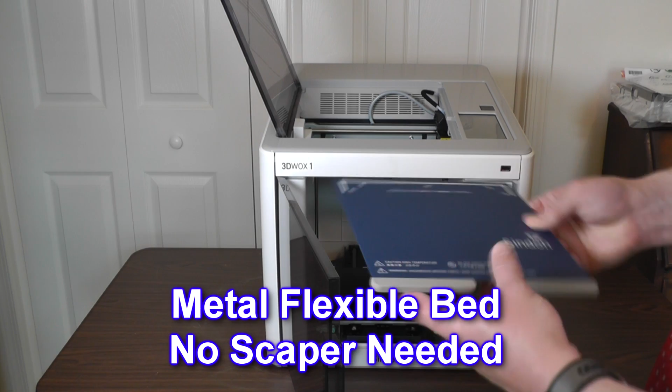The flat magnetic surface of the new 3DWOX1's build plate solves the problem I had with Y-axis play on the original DP200's aluminum bed, as well as solving the bed adhesion problem I had with the sister model DP201's build plate. And the new flexible heated bed plate not only affords great quality prints, but also provides the ability to flex and bend the plate to ease print removal with less use of the dangerous scrapers, knives, and other tools. I reported both of these issues to Sindoh on their previous models, and it's great to see a manufacturer that listens to its users and responds accordingly.

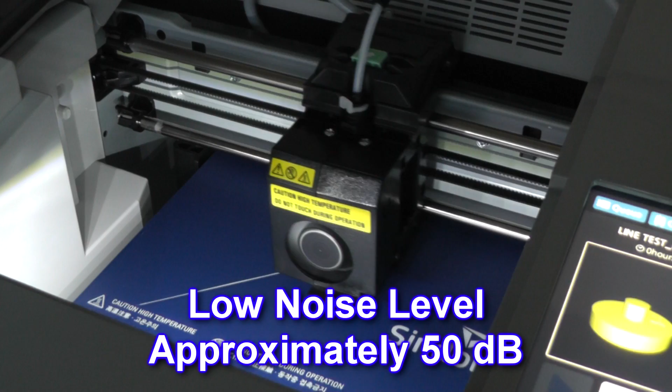But wait, that's not all. I noticed right away that the 3DWOX1 is way quieter during operation than previous models. Actually, all I regularly hear is the fan noise. It is a significant improvement. I could stop here and we'd have a superb machine, iterated over several models to result, in my opinion, to be the best feature-rich and performing 3D printer for this price range.

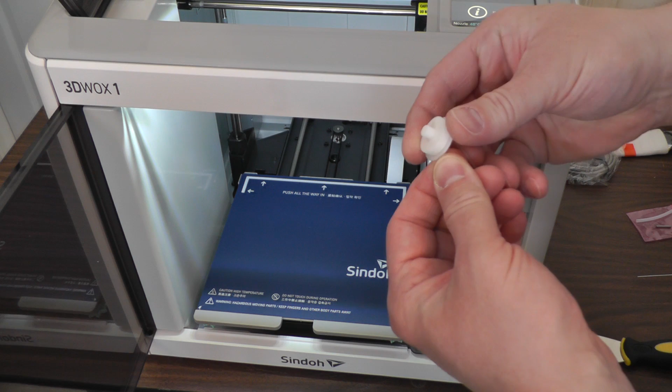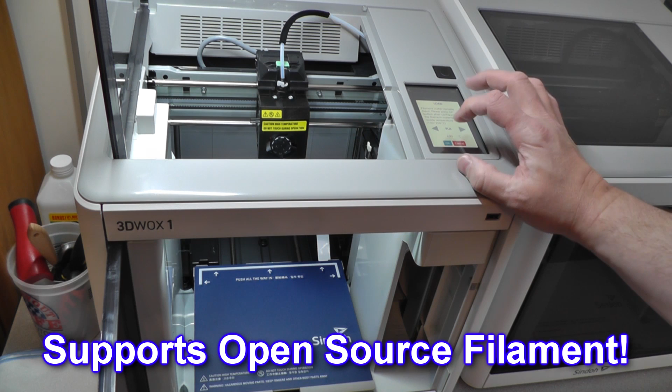But the 3DWOX1 has one last trick up its sleeve. It now supports open-source filaments. Yes! Sindoh listened to us users yet again and have allowed any third-party filaments to be used with this machine. On paper, it supports PLA, ABS, PETG, ASA, and PA. On-screen guidance assists you in loading and unloading open-source filaments.

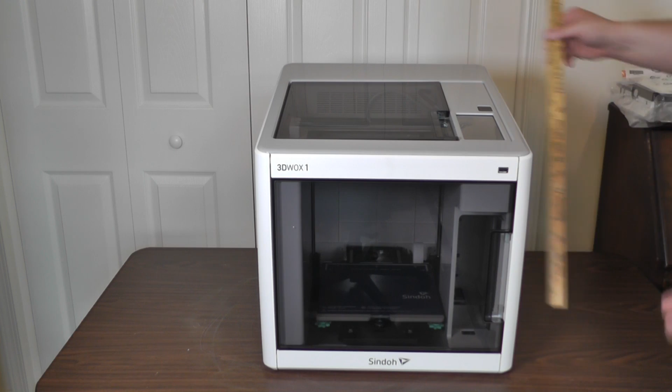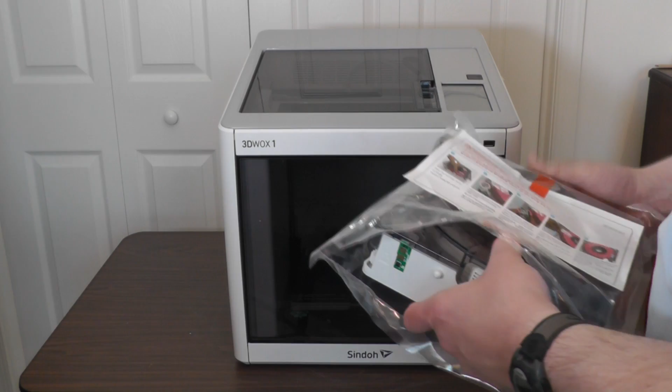The 3DWOX1 measures in at just under 18 inches cubed and weighs a reasonable 33 pounds. It uses both proprietary chipped filament, currently available in 9 colors, as well as open-source filaments on spools less than 67 millimeters wide and less than 213 millimeters in diameter. The proprietary filament affords the ability to control the quality of the materials used and allows auto setting of machine-specific parameters to allow the best prints possible.

It also provides the neat filament auto load-unload feature, which I've grown to love. But I think I'm really going to love the ability to use different colors and styles of open-source filaments. The printer can be attached to your computer via USB cable and wired or wireless networking. Very capable slicing and printer management software is included, but third-party slicers can be successfully adapted into the workflow easily.

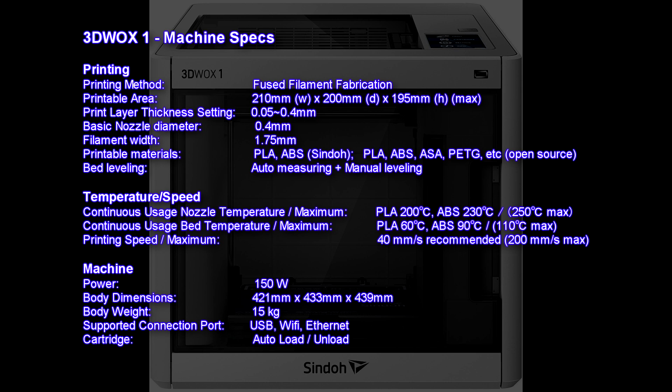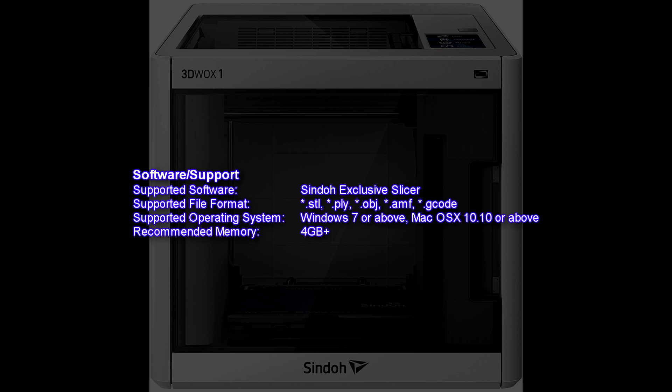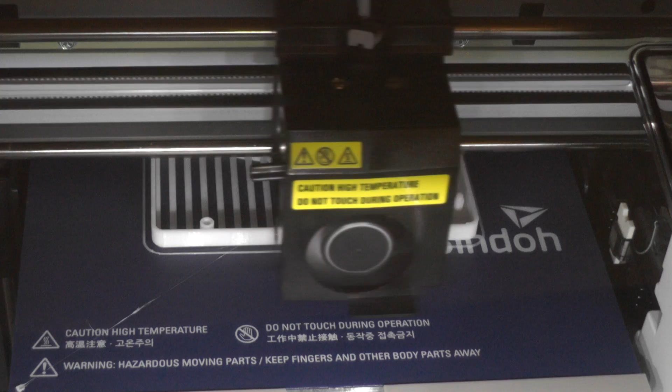I really enjoyed using the previous DP200 model for my designs and prints over the last several years, and I think I'm really going to love the new 3DWOX1 and its enhancements and improvements over its older sisters. In my opinion, the 3DWOX1 is to date the easiest and best quality turnkey 3D printing solution for the masses.

Here we have our 3DWOX1, manufactured April 18. Nice handles for transporting around. You pop out these 4 clips at the bottom here, and the lid comes off very easily for unpacking. We're provided what looks like a full cartridge of white PLA filament. A standard IEC power cord, looks about 6 feet. Also provided a USB cable, which is a nice touch.

A nozzle cleaning tool, which you would use to push down in the top of the nozzle to evacuate any filament. A scraper, nice touch. This is a spring nozzle cleaning tool and a tube for cleaning the nozzle, and a USB drive which has your software on it. Also included is a quick setup instruction manual. Let's dive in and unpack this baby.

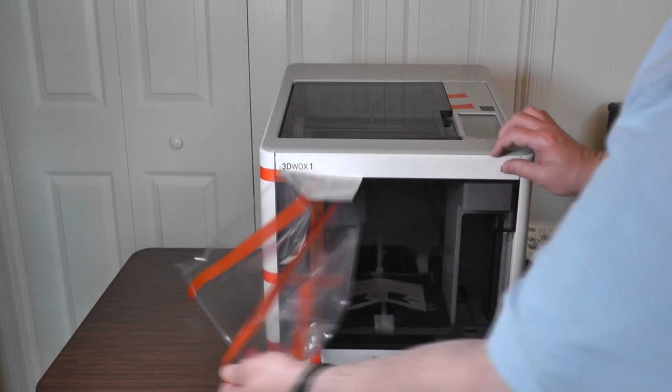Like any printer, remove all the orange tape, inside and out. The bed is well secured for transportation with a giant tie wrap. Use wire cutters or a heavy pair of scissors to cut it, and carefully remove the packing from the bed.

And now a quick overview. This is the 3DWOX1, very similar in color and style to the previous DP201. Has the transparent smoked doors, which are lighter than the original DP200, which is nice.

Cartridge goes in here, or your open source filament spools. Your 5-inch display, your power button, and your heated metal flexible bed. Just grab it in the front, pull it out, flex off your parts. Real nice concept, combines both of the DP200 and the DP201. When you're done, slide it the whole way in, drop it down. That's it, you're in. Magnetic. On the back, there's a power connector, Ethernet network, USB, and a replaceable HEPA filter.

Just some vents on the side. The measurements are roughly 16.5 inches, 14.5 inches in the front, a little over 17 inches in the back, and about 17.5 deep.

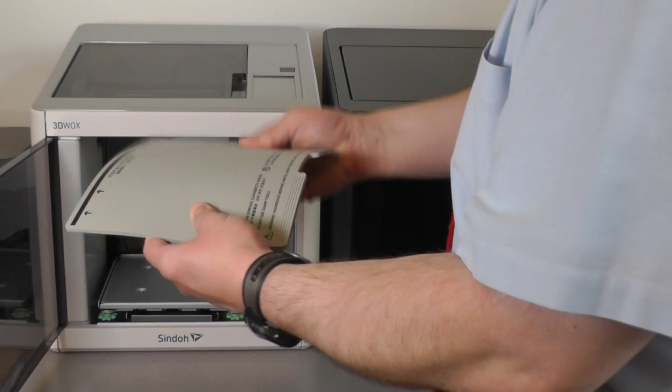The original DP200 had this non-flexible heated aluminum bed. You push these clips down, popped out this rigid bed. I always had some issues with the play in the Y-axis because of those clips, but it did some really nice prints because of the solid aluminum bed. Now the DP201 did PLA only, but it had the flexible rubber bed. This was great for removing your prints, but I had issues with warping and not sticking to the bed because it wasn't heated and it wasn't completely flat.

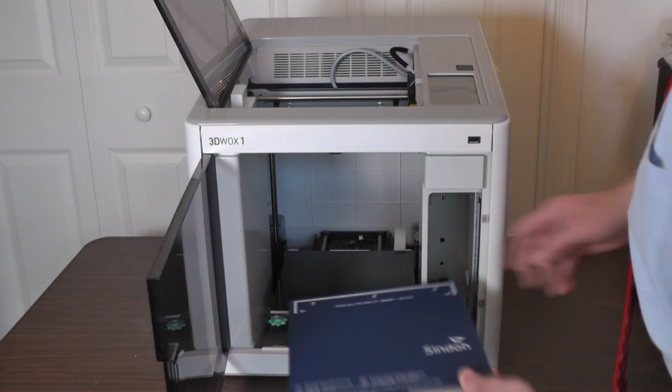So this is where I think the 3DWOX1 is going to excel. The bed has the properties of both the DP201 with the magnetic flexible bed, but also the heated aluminum metal flat bed of the DP200.

Let's power it up. I won't make you sit through this, but it seems to take about a minute to boot up. On the first boot, it wants us to finish leveling the bed, so we'll do that.

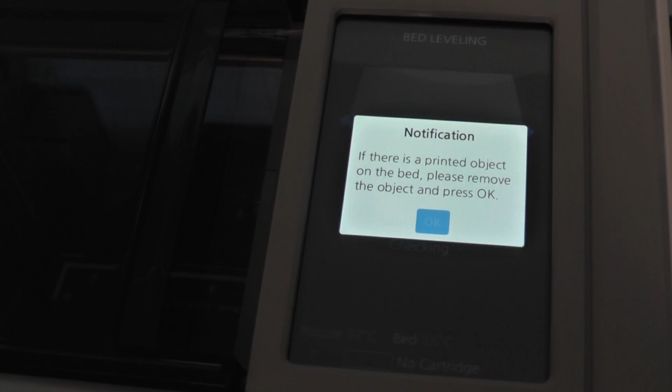If there's a printed object on the bed, please remove it and press OK. What's happening now is the bed is lifting to the home position, and I can hear right away that it's much quieter than the DP200 or DP201.

Right now it's actually checking the bed height or the bed level. There's a little sensor on the bottom of the head, and slowly the bed is moving up and getting a reading. That's how quiet it is.

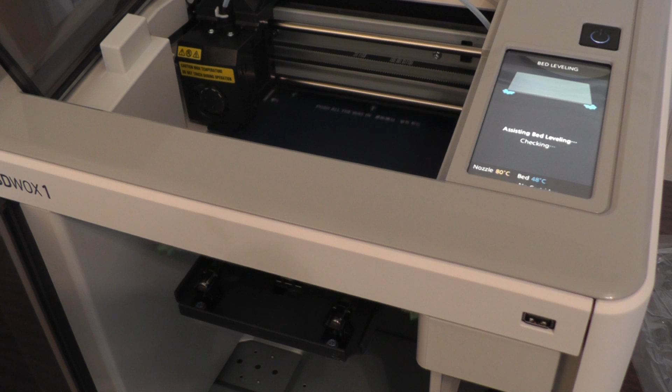I'll make the adjustment as indicated. Hit the OK button, and it will go through the process again to check and get readings for the level. After gyrating for a bit, it parks itself, and it says that our bed is level.

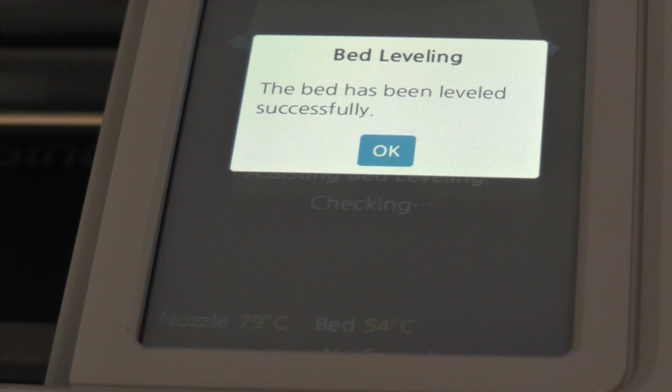We've been provided with one roll of white PLA chipped filament. Let's load that up in the cartridge slot.

Easy as that. The display prompts, do we want to auto load filament? We say yes. I apologize for the dark video - the display is so bright that I had to turn down the iris on the camera so it would be clear.

It takes a little bit until the temperature is optimized and it can start feeding the filament through the tube and down into the extruder. But it is automatic on these Sindoh provided cartridges.

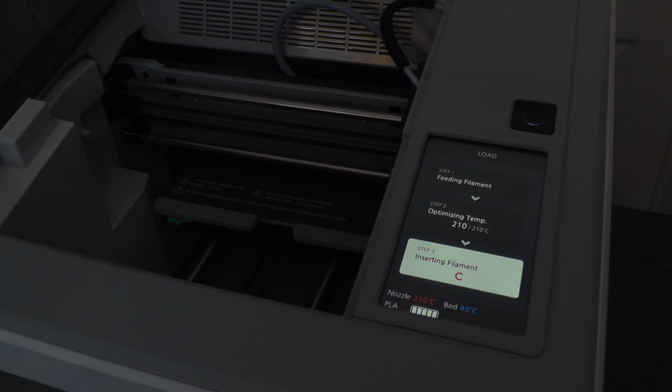Here we see it's optimizing temperature. Of course, at the bottom it knows that it's white PLA because of the chip. When the optimum temperature is reached, it will begin inserting the filament. The gearing will actually push the filament from the cartridge up through the tube you see in the upper left, where the black and white tube are coming down into the extruder, feeding the filament in and pushing some initial pieces, melting them down into the inside waste case.

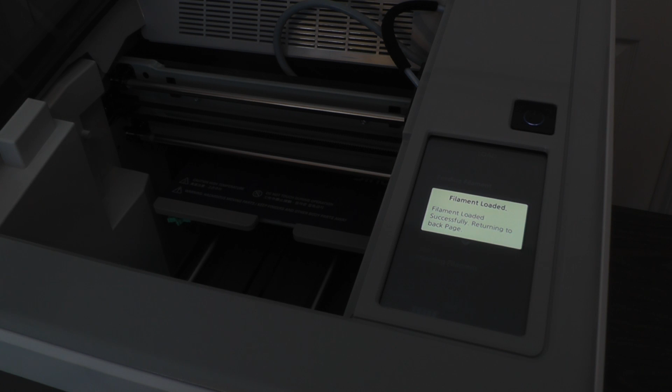Let's tour the menus. The print button allows you to insert a job on a USB flash drive for printing. The cartridge menu is made for loading, unloading, and unlocking the Sindoh provided cartridges. Most of the goodies are in the settings menu. Let's go through some of these.

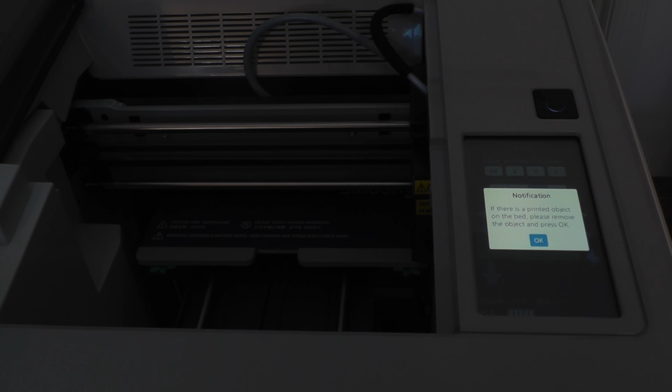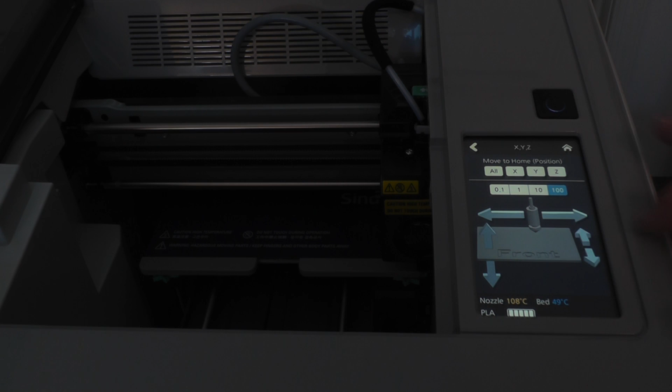The XYZ option allows you to jog the head around in all three axes. We can move left 10 millimeters at a time, switch it to 100, go left 100 millimeters, go in the Y direction, then move 100 in the Y direction, and so forth.

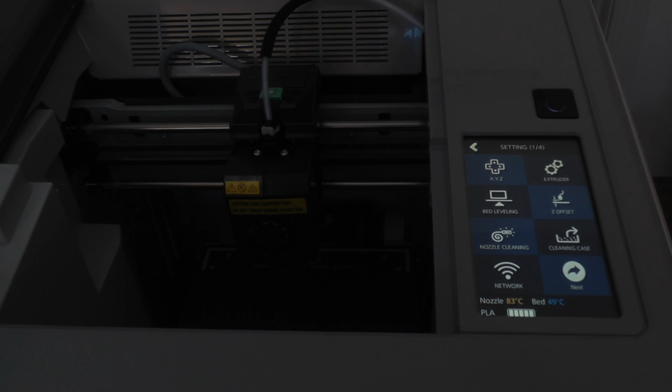We'll move on to the extruder option. This takes some time as it has to heat the nozzle up to the target temperature required.

I just realized we can turn the internal lamp on so we can see a little bit better inside here. Go over to the lamp setting: on only when printing, always off, or always on. There we go, little light inside there now. Let's go back.

Let's see if we can extrude a little filament through the nozzle. We'll go 10 millimeters, see if we can get it to squeeze out. Doesn't take very long, hit it again. Thought maybe something would be coming out under the nozzle there, maybe I just can't see it. Yep, there we go, a little bit of white PLA filament. Be careful under there, that nozzle is hot.

Bed leveling, we've been through that process already. Z offset allows you to move the nozzle and the bed closer together. It's at 0.25, we'll leave that as default. You can adjust that later with a business card.

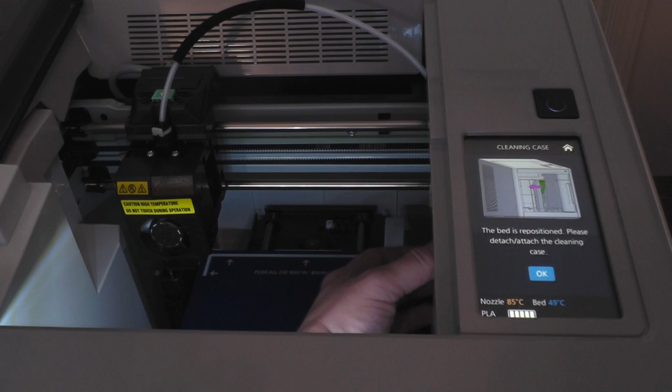Nozzle cleaning takes 5 to 7 minutes and does a thorough cleaning, heats up real high, and pushes some filament through. The cleaning case is inside, and it's where excess filament goes, and you can clean that out every once in a while. After the bed has moved down, we can reach in here and pull out our cleaning case, which has particles of filament that have been extruded through the head and wiped off. Clean that every once in a while when it tells you.

I just noticed this appears to use the same nozzle printhead as the DP200, with the fan on the front and the fan on the side, and this connection up here. This looks very similar, so I believe it's the same head as the DP200. Again, this is noticeably quieter in the Z-axis movement than the previous models.

Continuing our menu tour, let's go into networking. Of course you can do wired or wireless, which is nice. We'll go on to the next page of options.

We did look at our lamp before, it's right up under here. You can have it only on when it's printing, on all the time, or off all the time. It does make a difference.

Bed lowering, obvious. Power saving mode, you can set when you want it to go to sleep. The beep sounds the menu makes: high, low, medium.

Nozzle setting, you only use this after you change your nozzle. There's a number written on the bottom of the nozzle from the factory, and you put that in there to match it up.

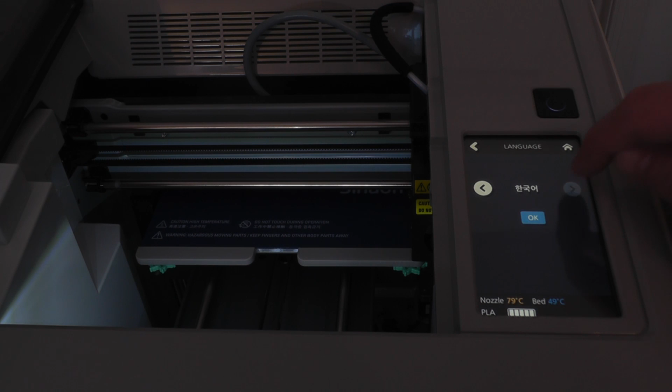You can have it send you email notifications on your jobs. I've never set that up.

Units, of course you can do Celsius, Fahrenheit, meters, feet, imperial units, metric.

Our time looks correct, not sure where I got that from. Maybe it was set because I haven't hooked it up to the network yet. Set your time zone.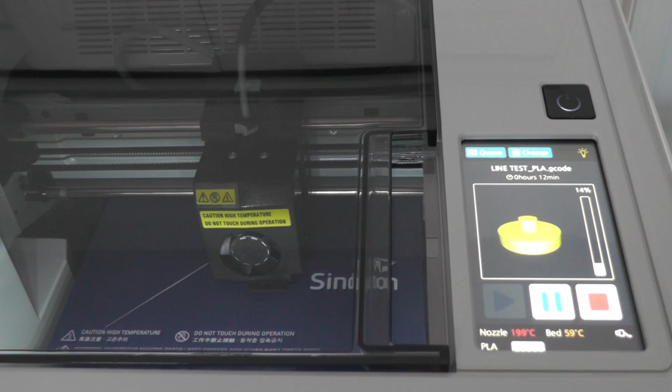Now, yes, as it moves up the layers, it does increase in speed, and it is a little noisier. But remember, I do have the lid up here to take video.

Once the bed has cooled down to about 50 Celsius, we just grab here, remove our magnetic bed, flex it a little bit, let's see if we can get our part off. Yep, popped right off, awesome. Put our bed back, and there we go.

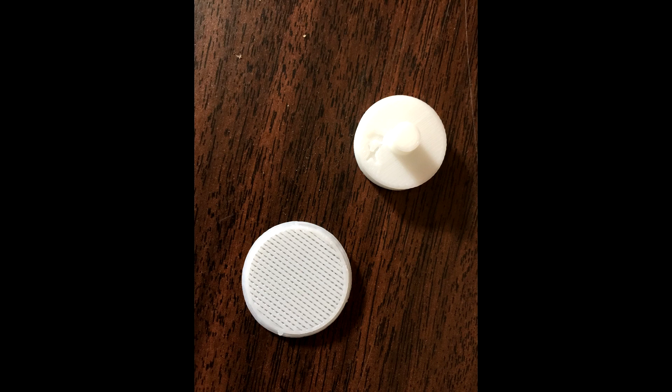Now I'll just do a real quick overview of the software they provide. Here I'm adding my printer. It found it on the network. I use the Ethernet on mine. It shows over here 3DWOX1 white PLA. I can go into settings.

When you're in easy mode, you can just say fast, normal, slow speed versus quality. I usually run in advanced mode though, it gives me a lot more options I can choose. Just change it like that to advanced mode.

Now when you go to settings, you have these tabs at the top here, setting your layer height, your nozzle temperatures, and the Sindoh PLA and ABS have presets in here. So this is the easiest way to get started without causing yourself any trouble.

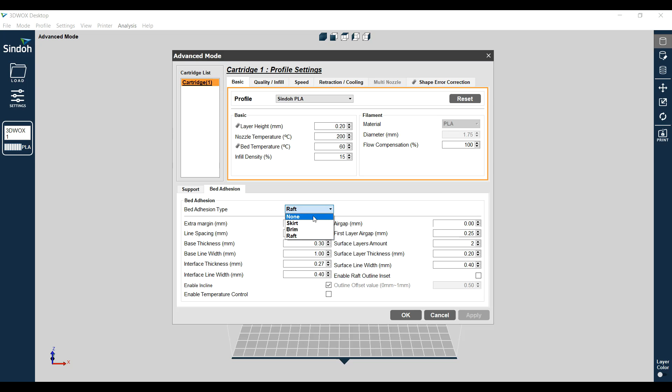Looking in the bed adhesion tab, they recommend a raft. I like to print things without them, but your mileage may vary. Quality of your infill, your wall thicknesses, top and bottom layer thicknesses, retraction combing.

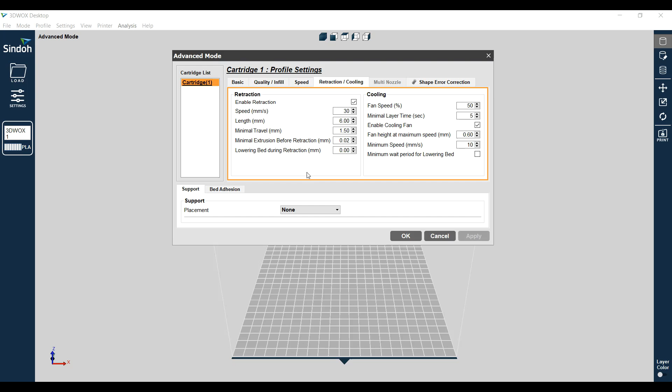Speed, your print speed, 40 is their default, 10 for the first layer. Here's your cooling settings and your retraction, and some advanced options over here. But it's very capable software for slicing and printing.

Here you can see your printing settings, which is nice across the network. Look at your cartridge information.

Now I'm just going to show some of my first test prints that came off this machine. I really pushed it to the limit.

I really prefer to use Simplify 3D for my slicer, and I was able to do that on here. I had to set up a profile that was similar to that for the 3DWOX. So the first jobs came off here.

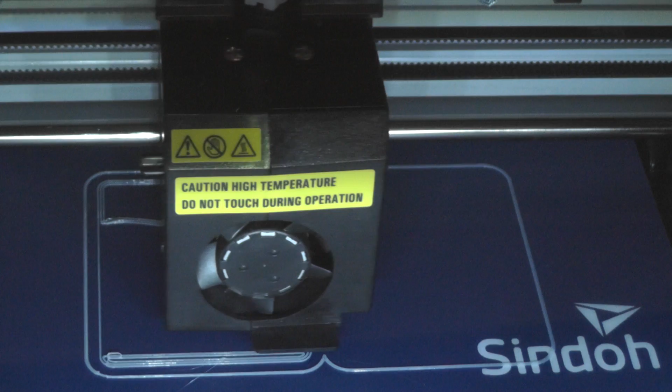This is the very first one that I printed. I went in, it was an old job that I had designed in Fusion. I sliced it in Simplify 3D, and then I used the Sindoh 3DWOX desktop software to load the G-code and send it by network over to the printer to print.

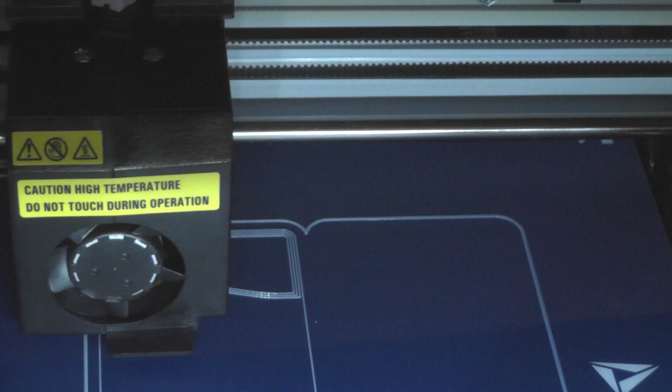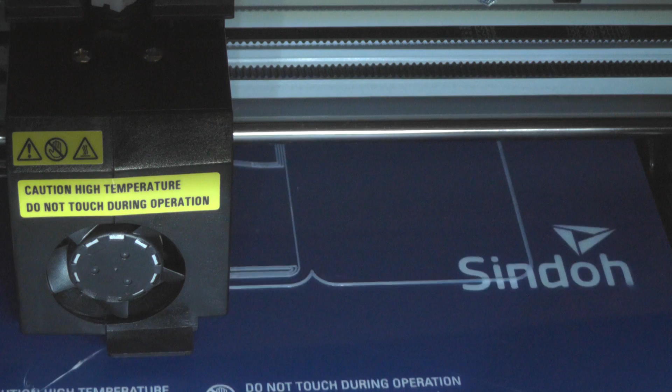And while it was pretty nice, I really felt that the first layer was not smashed down far enough, but I hadn't adjusted anything, so I've since decreased the gap between the extruder and the bed and played around with a couple settings to get a more squishy first layer. Here's this first job midstream.

Let's remove this first job from the bed. Now you're going to see a lot of this model throughout my channel. This is an Arduino Uno case. It has these nice screw bosses here and these little pins sticking up, and I print without a raft. It's my version of the 20mm test cube.

I like to see if it'll work, and I have other videos on my channel where I did this with some ABS, some PETG, Simplify 3D, so check those out and see what my settings were like and what I got as a result. This job I had a decent amount of trouble with printing on the DP201 because it

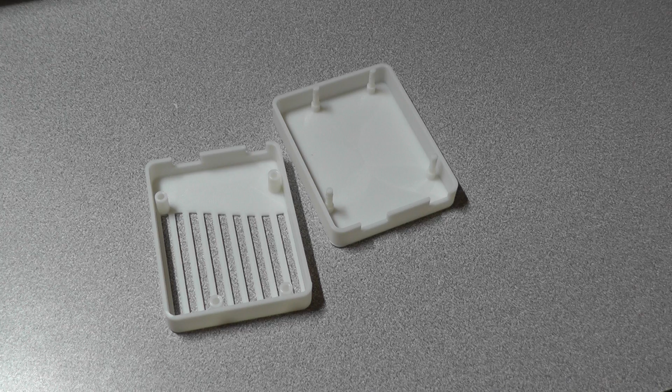would warp up on the edges, and if I used the Sindoh software, these little pegs would break off. Now again, this was sliced in Simplify 3D and sent over the network, but I think the quality came out really nice for a first print. It's flat, there's no warping, it's solid, so I can tweak the Z-gap a little bit here to fix that first layer, but for no raft, came out pretty nice.

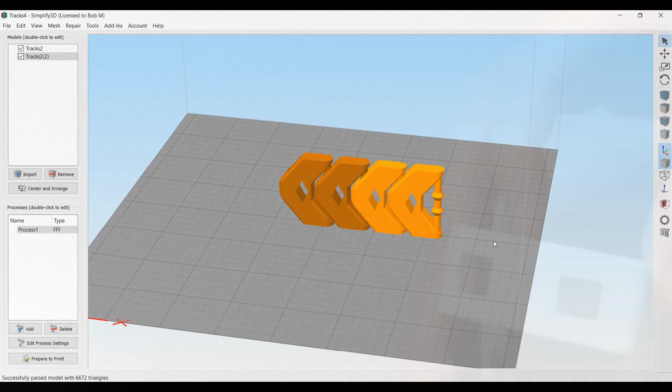Here's a set of print-in-place tracks. Again, I will print this with no tweaking. It's the second print I've done on the machine, and we'll just see how it comes out. If it comes apart, let's give her a shot.

When that slides out there, it always reminds me of something like a Star Trek replicator or something. It's pretty cool. Anyway, let's see what we have.

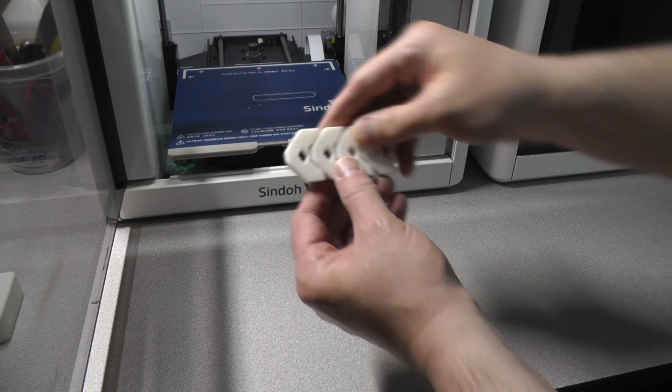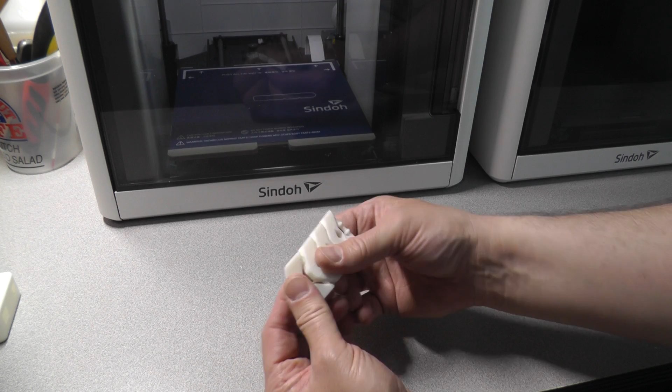Pops right off. Now, they're print in place, they're hinged. Will they break apart? This is the white PLA provided by Sindoh. Oh, yeah, I mean, a little stiff, but no, they came out nice.

This is a small enclosure that I made to put some weather station components in for one of the projects I did. I always had some issues with this because of the sharp corners and the flatness on the bed. It would warp up and pull off, so let's give this one a shot. It also has those screw bosses, those real high screw bosses.

Here we are, a few layers in. It's looking pretty good, nice and flat, adhering well to the bed. Now here we are a little further on in this project. I will admit I didn't tweak any of the settings in the slicer, so there's that gap in the concentric rings there on the screw bosses.

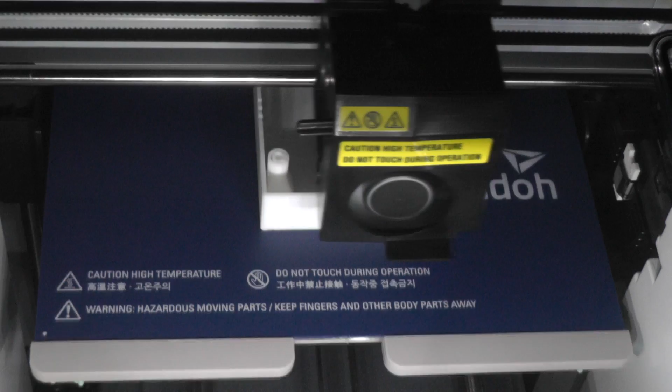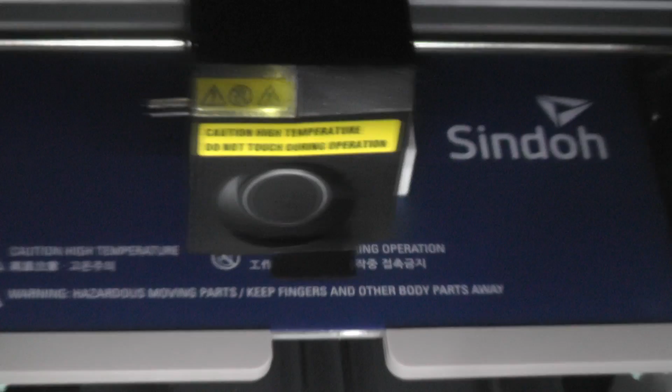Now this one I used the Sindoh slicer, and that's part of the reason for those little gaps in there, why I like to use Simplify 3D. You can do that single extrusion fill and you won't get that problem. But again, I didn't do any real tweaking here. This is just printing one off.

Now let's remove this project from the bed. I can see something went on here with this one screw boss. There's a bunch of particulate hanging off of it there. Again, I used the 3DWOX software on this one. This is the kind of thing that happens when I do that. That's why I like to use Simplify 3D.

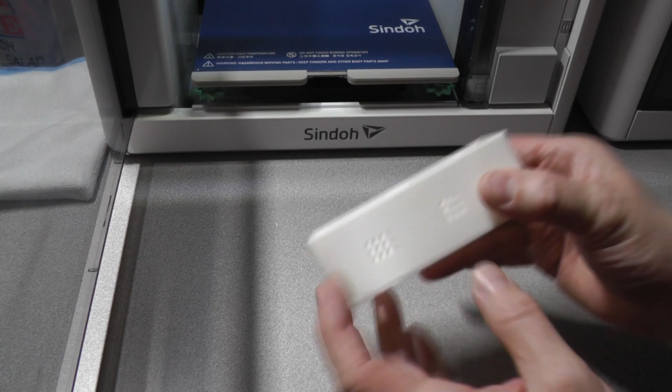There's a little ringing over here on this edge, but not bad for what, second print or so I printed off of here. Nice and square. The gaps in here, these little holes with no supports or anything, they came out real nice. Decent finish. Look at these holes on the bottom. Real nice.

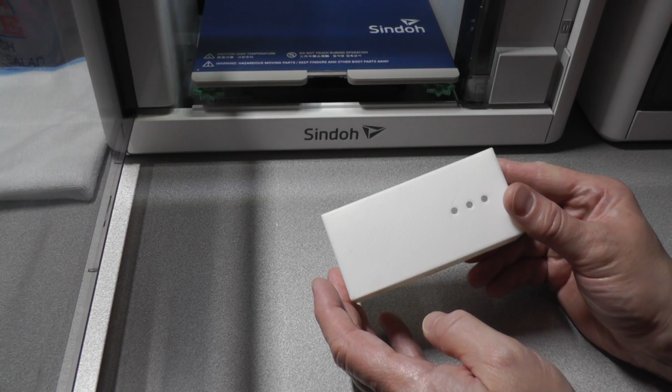Now inside here, I don't know what went on with this one screw boss. Something clearly got out of whack and caught on something, but luckily the strength is there. I can use it. It recovered and it kept going. Just a little flash on there.

And over here too, but again, no supports. So what do you expect? You're just coming up there on an angle. Perfectly usable part. Real happy with it. Imagine what happens when I tweak it and get the parameters set in.

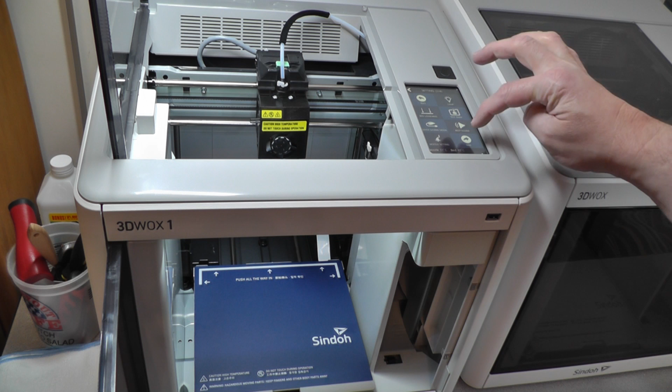Now, as far as open source filament usage, I'll just touch on this briefly here. I'm probably going to do an entire video on that. It warrants it. You basically have to go into the menu system here and say, I want to turn on open source filaments. And then it gives you a bunch of prompts and warnings, because you're not using the Sindoh chipped filament, on how to load it up. And there are some little tricks and tweaks I learned along the way, and even a modification I made to fit some larger spools. So I'll do that in another video.

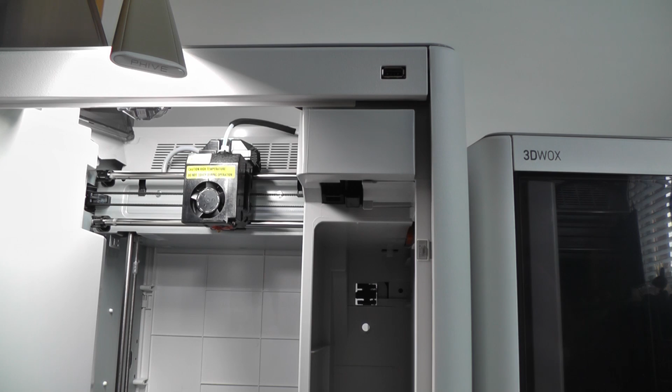But the general concept is you get the settings right, you take your third-party filament spool and put it in where the cartridge was, and then on the display you say to start loading, and it starts running the gears, and then you insert your filament into this little slot over top of this peg here, and it'll start pulling it in and it'll load it up.

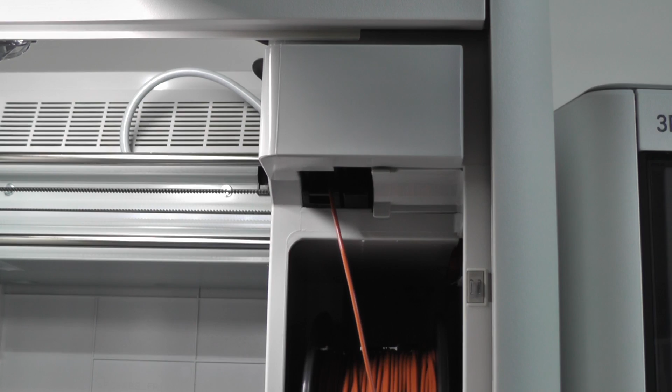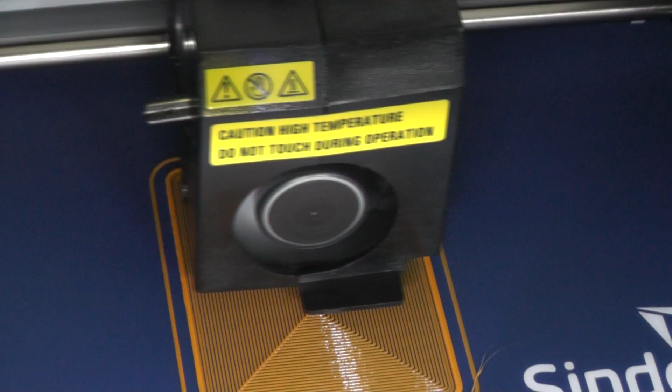Here's some Hatchbox filament in orange, 1.75 millimeter diameter. I was able to load that up. Again, I had to make a modification to handle the larger spool. I'll do that in another video. And also since then I've tweaked the Z offset so that these gaps weren't in the first layer. But after it prints, it looks perfectly fine.

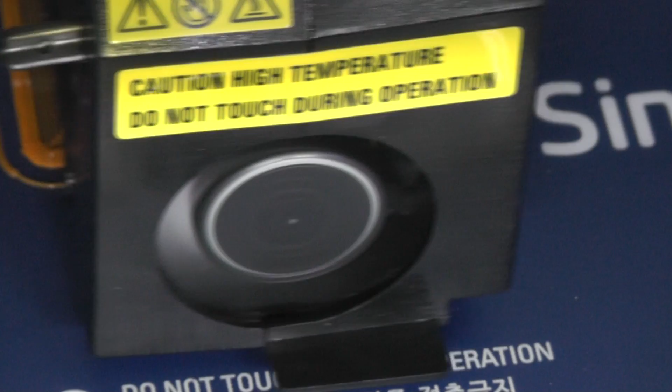And I did nothing. I printed this, I sliced it from Simplify 3D. I used the same settings as any of the Sindoh filament as far as temperature and speed and everything. I didn't tweak anything. I just let it go as default for now, and it worked beautifully.

Here I was printing my Arduino enclosure using multiple open source filaments and just wanted to look at the tolerances on the pegs and the screw bosses to see how consistent they were. So the orange was Hatchbox. The coffee color there was AMZ 3D filament, open source. Of course, the white was the Sindoh provided chipped PLA. All three of these are PLA filament.

Look at the nice finish on here. I'm very, very happy with it, considering I did no tweaking for any of the materials. Just went ahead and said print. See if these go together.

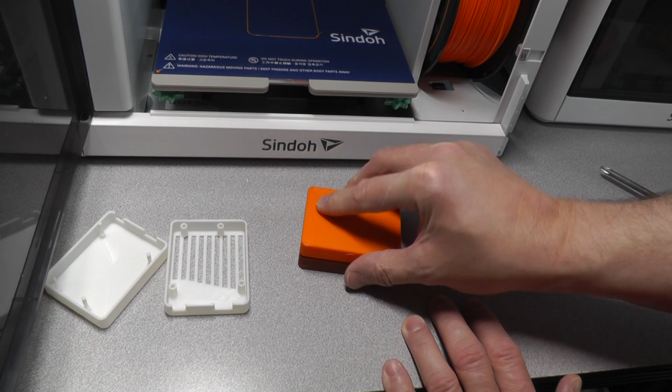That's a nice fit. Yeah. Matter of fact, it's a little tight. It's going to be hard to get apart. But that looks really nice. I'm real satisfied with that.

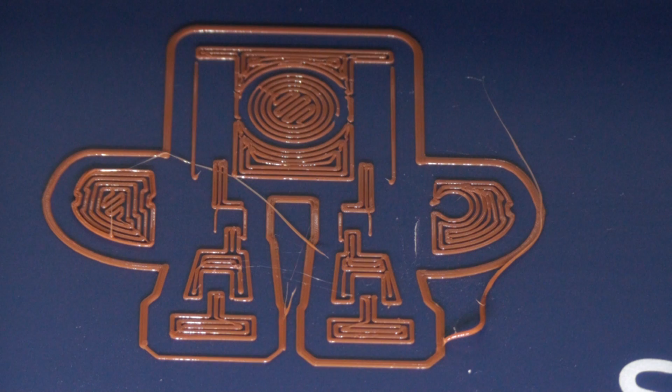Look at this first layer here for the MakerBot robot. This is with open source filament. And again, it could be squished down a little more. This is before I tweaked it on the Z offset. But I mean, that is some amazing accuracy there and a pretty nice first layer, given that I didn't tweak anything or fix anything up.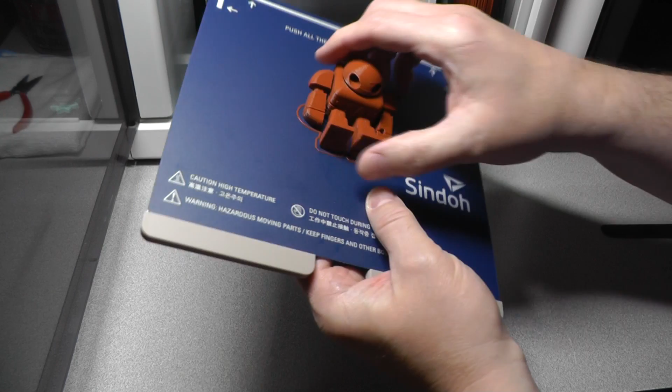And I'll show you how he works. He's a print in place robot and it worked perfectly. And real quick, I'll just show you this dude. He's a MakerBot, I believe a MakerBot robot, print in place, fully articulated. I mean, his hands, his knees, his head, everything. I've had to print him many times in the past. This was one off, no adjustments to the printer, probably like my 5th print, open source filament, using Simplify 3D as a slicer. I mean, I just threw everything at it.

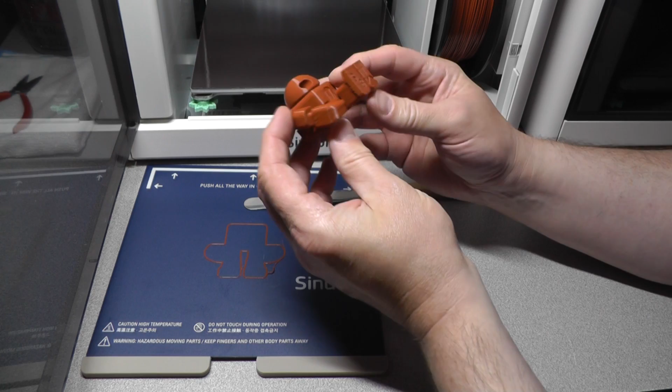And, you know, you got a little flash under here, but other than that, I won't make you sit through me breaking him all apart, but suffice it to say, except for one of his little joints in his knee, everything just came apart and he fully articulates after I snap him apart. I didn't even cut anything. I just used my hands like this to loosen everything up and break it apart.

And here's the little demo robot guy after I loosened up some of his joints. Again, like I said, this one knee just wasn't working real well, but he's perfectly serviceable. Every other joint worked. That one there, I should have just been more cautious with it and used the knife or something to cut it open, but I was just anxious. So there you go, little maker robot with a busted knee, a bum knee as they call it. But he's pretty cute. It worked out pretty well. Stay, little man.

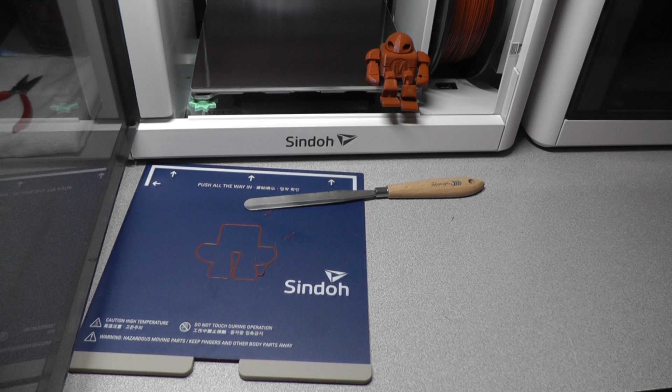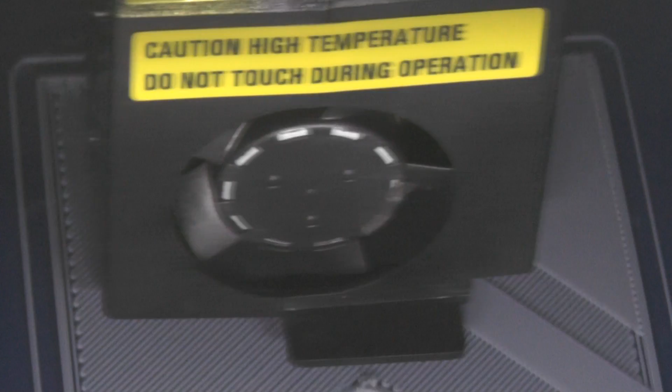And this is the Sindoh ABS filament in their cartridge. I did spend a decent amount of time trying to get a profile that would work for it through Simplify 3D with the right settings. So actually this is coming out pretty nice as far as ABS. I really don't print a lot of ABS though, but I just wanted to see if it would do it.

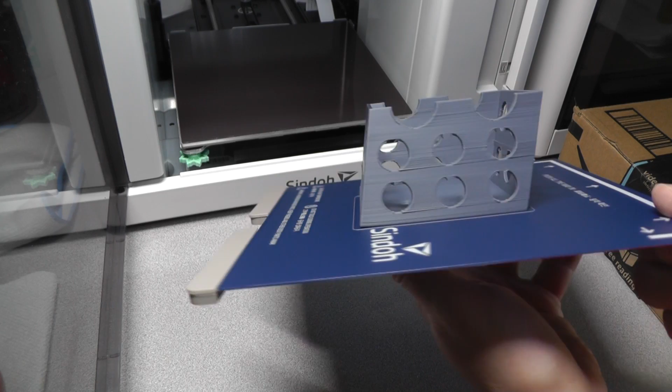This is the same ABS. This is one of my photo battery holders that I mount on the wall. There is some warping in this front left corner, but it's pretty many layers of solid ABS on the bottom there. No supports were used, so I can just clean out those little holes there with my scraper. Again, what's nice is it just pops right off. Not the best print, but remember, no glues, no tape, no hairspray. Right on the bed here, and it popped right off, and I don't print a lot of ABS.

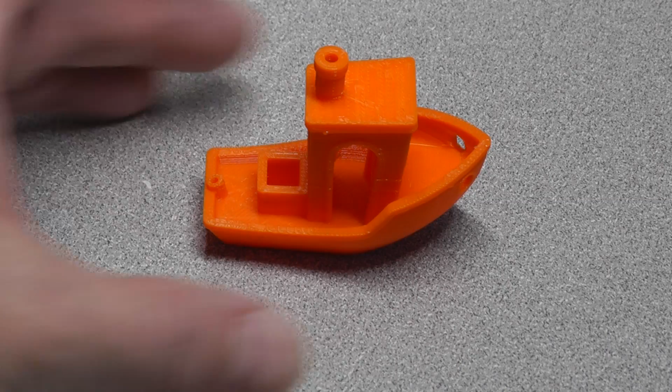Here's a 3D Benchy using the Hatchbox Orange PLA in the open source mode.

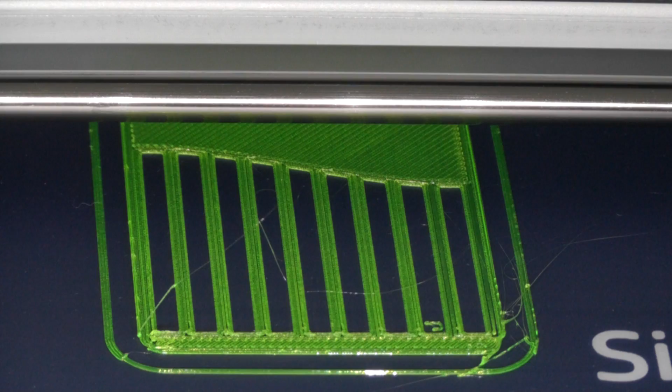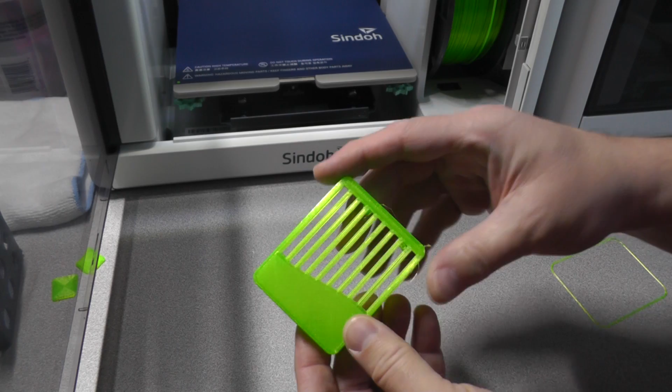Now this is PETG. I did head down that path. It took quite a bit of time to get a profile in Simplify 3D that worked for it, adjusting the temperatures and the bed temperature and the offsets and just all kind of stuff. So I will make those profiles available at some point for Simplify 3D, but I think I'm going to do a whole video later on what I did to set up and get this PETG working.

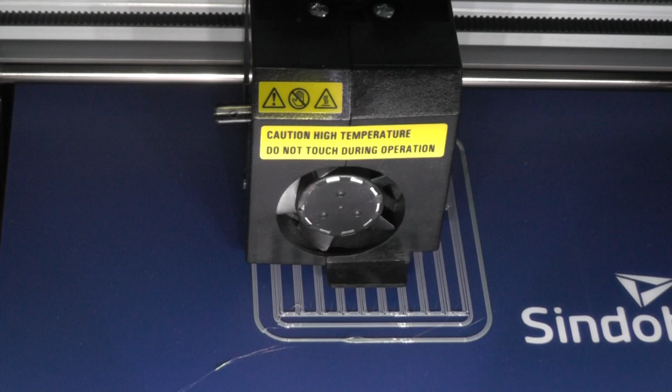And this is PETG also. It's the eSun brand. This is the first layer. And a close-up of the completed PETG project here.

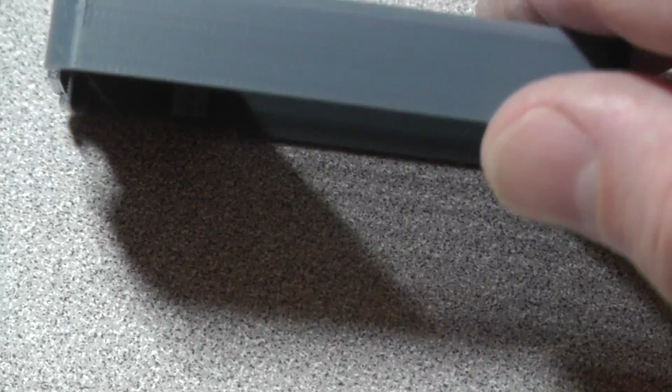Well, I promise you this did not start out to be a 30-minute long video, but if you hung around until now, congratulations and thanks. And if you think about it, a 3D printer with supplies is an expensive purchase, so why wouldn't you want to be completely informed as a consumer?

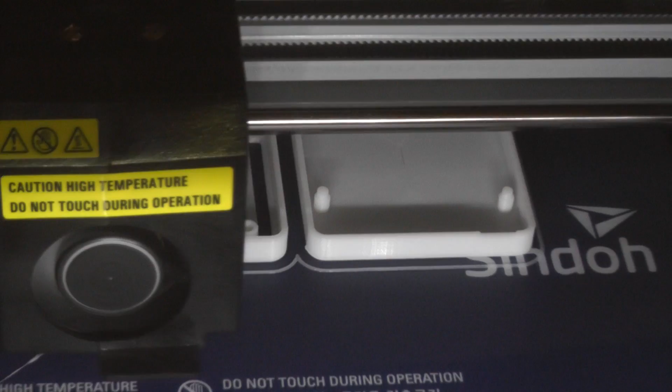Hopefully, I've hit on all the things you need to know to evaluate this printer, and I think you'll find that it not only competes very well against other options, but exceeds them in most respects. I can honestly say that the new 3DWOX 1 is the best 3D printer I've used, and I would recommend it to anyone, beginner level to enthusiast, who wants a reliable, consistent, and easy to use 3D printer. And now with the ability to use open source filaments, the 3DWOX is even more desirable.